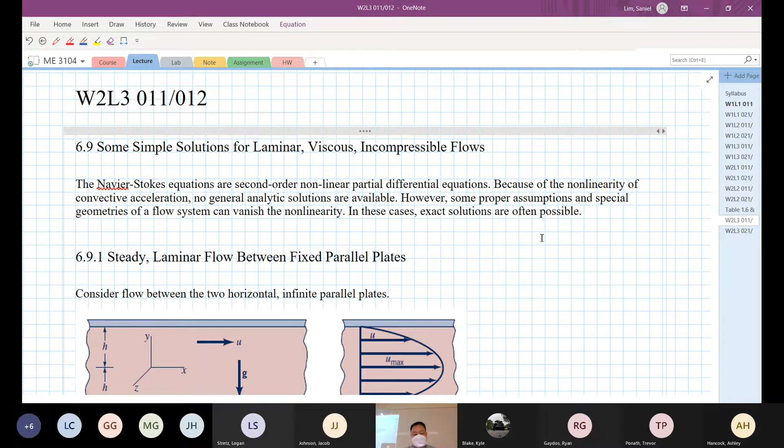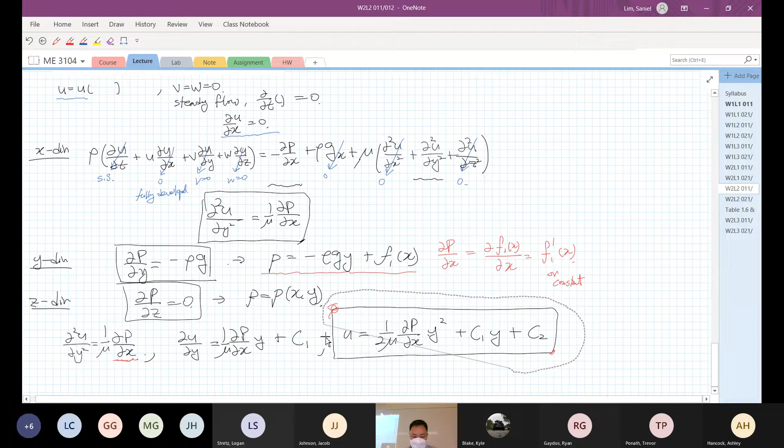So let's go back to here. This is what we have from yesterday. Let's just copy that. Yeah, it's huge. Okay.

Now it's time to plug in the boundary condition. We still have the same setup: two infinite plates, up and bottom, top and bottom, fixed at their location, and the flow is fully developed and steady state. It is incompressible Newtonian fluid.

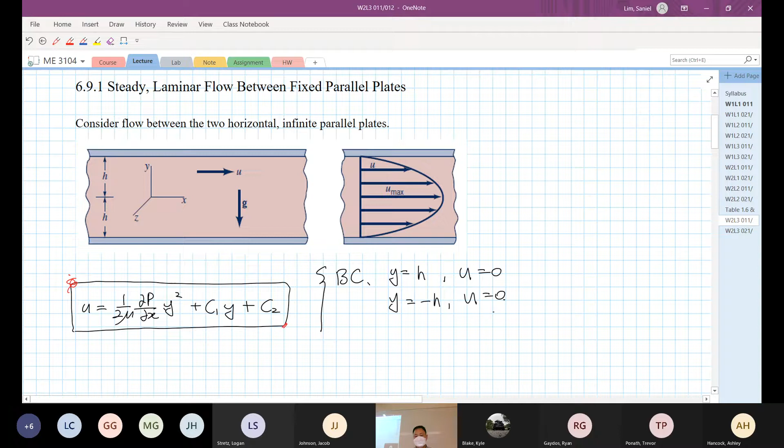So now it's time for the boundary conditions. What we have here is when y equals h, u is 0, and when y equals minus h, u is 0 as well. It looks kind of similar, but it's going to give us the answer for C1 and C2.

If you plug that in, then u at y equals h: it's going to be h here, and C2. P here is basically constant. Then you have h squared plus C1h plus C2.

If you plug in y equals minus h, you'll see the same term here, except for this one, and those are 0. So we have the equation C1h plus C2 equals 0, and minus C1h plus C2 equals 0. That means we have to set C1 equals 0, otherwise it's not solvable.

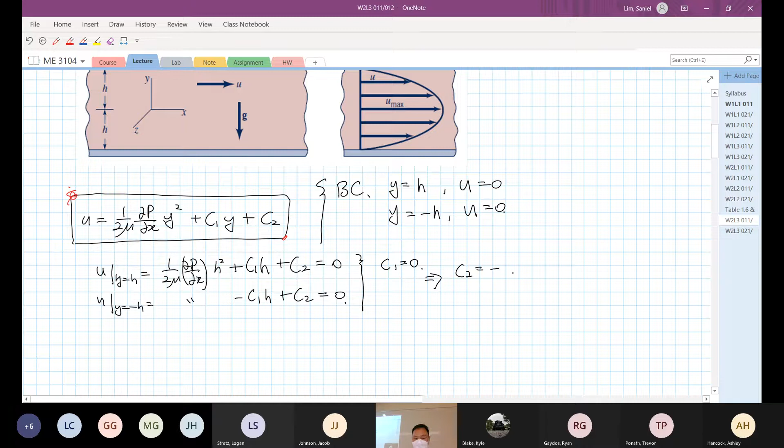From here, we can set C1 equals 0, then C2 automatically comes out of this expression, which is minus h squared over 2 mu, dp/dx. Then you can plug that into u. If I write down the organized form, that's going to be 1 over 2 mu dp/dx, then you have y squared minus h squared.

So this is the parabolic equation. This is the velocity profile between the fixed plates.

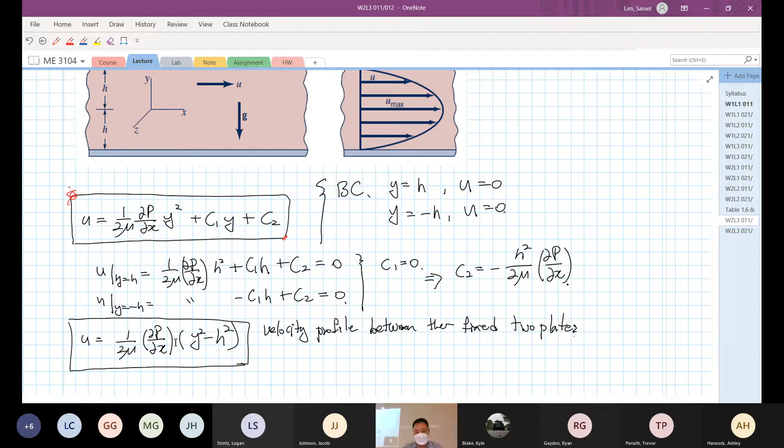So if you know the pressure gradient, you can find the velocity at the certain location, or if you know the velocity, you can find the pressure gradient, so on. So when you have an expression between the velocity and the pressure gradient, then you can just do a bunch of other things too. So first, the volume rate flow.

So in this case, we are actually having the 2D dimensional geometry here. So it's going to be not Q, it's going to be Q over the width - in the z direction, which is the axis through the screen here. Then we can just use the notation of Q.

And it's as simple as the integrate from the bottom to the top for the velocity, right? That's going to be minus h. Then you have an expression of the u now, so I'll just put the u, and it's integral with respect to the y-axis. This is per unit, let's say, the z axis.

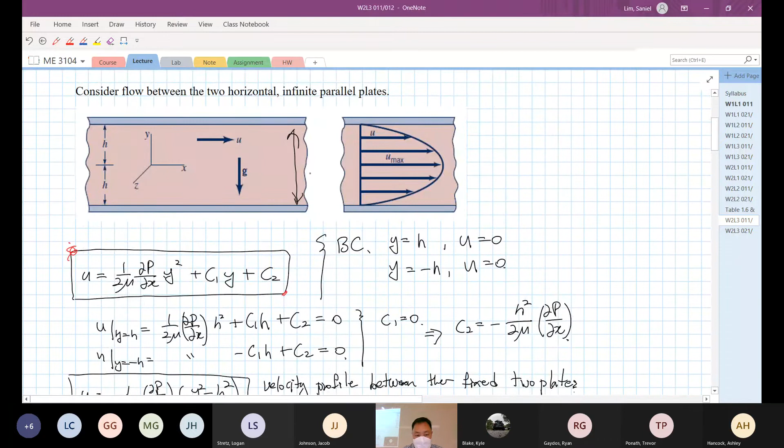All right, then it's going to be Q over A. So then simply you can just divide by the area. In this case, actually, the area is the 2D - so is this 2H. So everything is per unit width in z-axis, so the same as Q in the 2H.

Then if you just divide by the 2H, it's going to be simply - let's use this expression - then H squared over 3 mu delta P over L.

The next thing is going to be max velocity.

So we have a parabolic expression for the velocity profile. Which location will we get the maximum velocity here? Of course, along the center line, right?

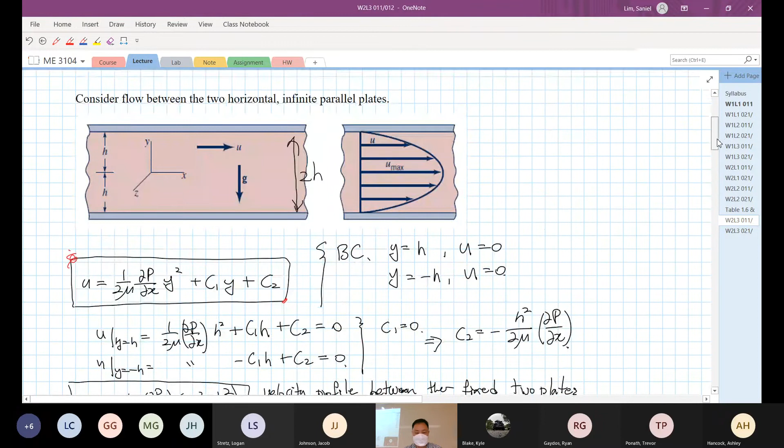So along the center line, y is going to be 0. In the equation, when you put y equals 0, it's going to be the highest absolute value from the minus h squared, but the dp over dx is going to be negative, so it's going to be the max number.

So simply, u max is going to be when you plug y equals 0, then the expression is going to be 1 over 2 mu, let's write dp dx, and minus h squared. But then you can simplify this to 2 mu.

Express this with the mean velocity, then it's going to be what? This 2 over 3 over 2... so when you have a mean velocity, the maximum velocity is going to be 1.5 times the mean velocity. Okay, so that's the relation between the mean velocity and the max velocity.

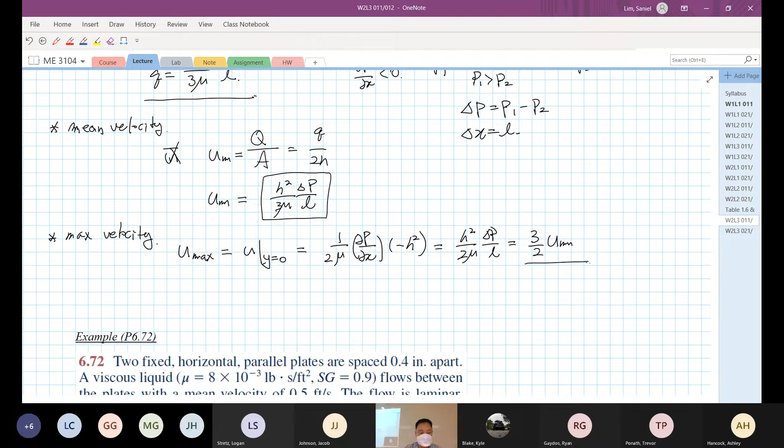Anyway, if you have an expression for the velocity profile, you can simply find those values if you need to.

The last thing is the pressure distribution, the pressure variation. So from here, we left the expression equation from the y direction: p equals minus rho g y plus f(x), which is from the differential relationship, dp over dy equals minus rho g.

From here we know p is simply minus rho g y plus an unknown function in terms of x. Then we can actually now know it's a pressure gradient, because when you take the partial derivative with respect to x, it's the same as dp over dx times x, so we can just replace it with that, and leave the constant term at the end.

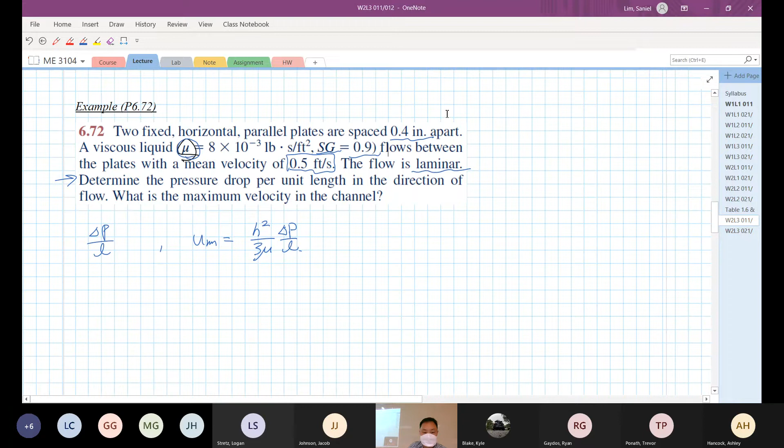We set up the axis in the middle of the pipe, the middle of the spacing. So the 0.2 is going to be the one. So when you plug it in, h is 0.2 inch, then you have to convert it into feet, right? Everything is in feet, second, and pound units. So when you do it, it's going to be 0.01667 feet.

Then rho is going to be what? Rho H2O multiplied with the 0.9, that's the specific gravity. So it's going to be 1.940 slug per feet cubed.

You don't need this time. So the mean velocity is 0.5 feet per second. It's going to be 0.01667 squared, then 3, and the mu is what? The 8 multiplied by 10 to the minus 3.

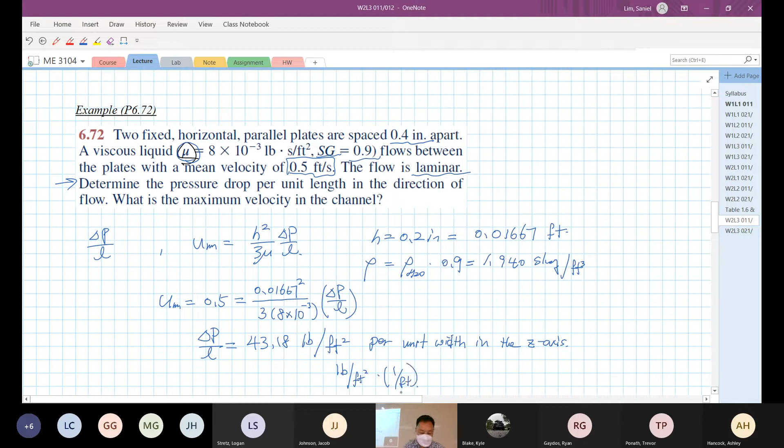Then the last one is maximum velocity, u max. So it was simply what? 1.5 times the mean velocity. So it's just simply 0.75 feet per second.

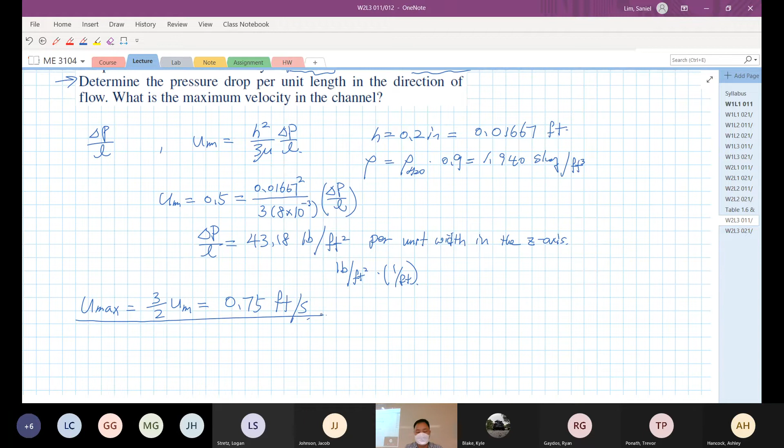So when you have those exact solutions from the specific flow field case, this is one of the simple ones. Then you can just use the exact solution to solve for any flow field based on a similar setup here. So you're going to go through some of them more.

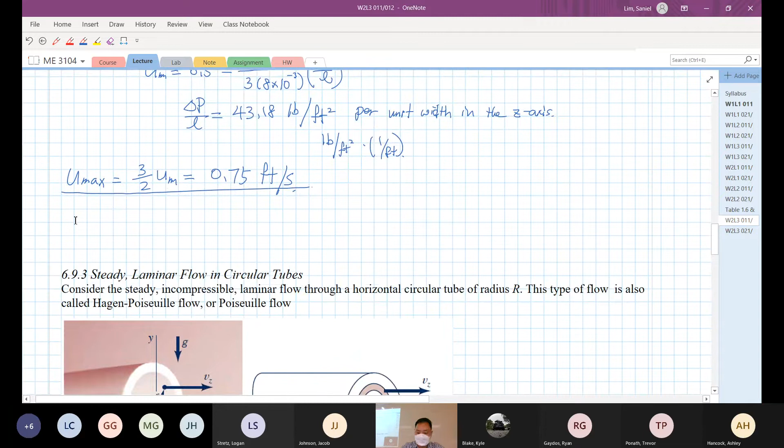Actually, another one is Couette flow, but I'll just jump into the one in the circular tube first because we're going to deal with this equation tomorrow in the lab.

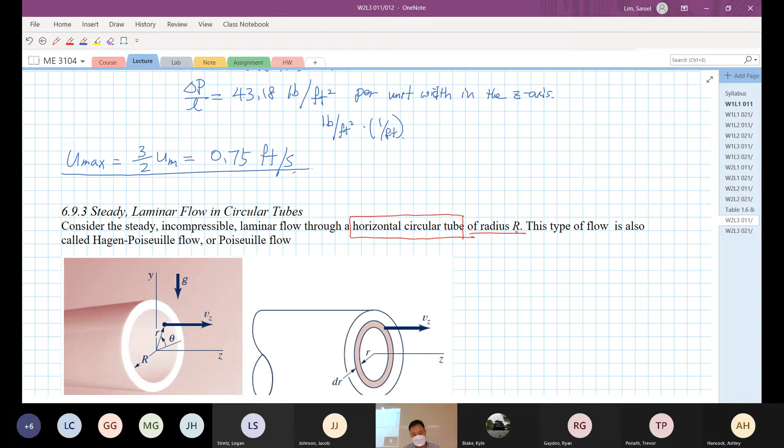Now consider a steady, incompressible, laminar flow. Everything's the same as before, through the horizontal circular tube, but we have a slightly different setup with the radius r. We call this type of flow the Hagen-Poiseuille flow, or just simply Poiseuille flow. Those are all the same name. This is really a popular one because we just flow all the water in the pipe, and this equation can be applied.

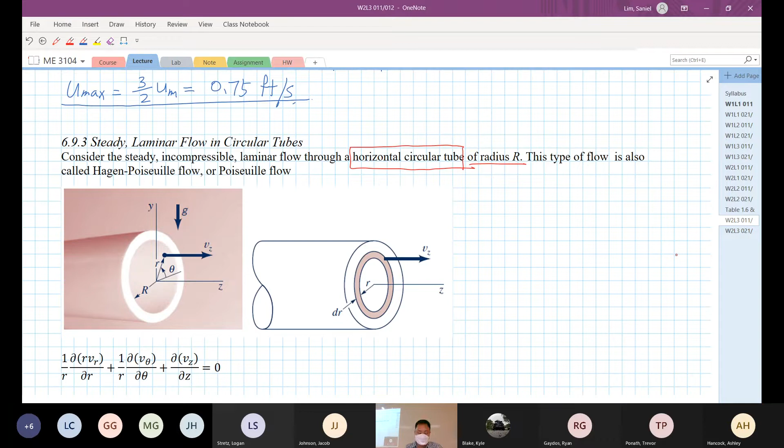This exact solution can be applied to any water flow or Newtonian flow field as long as it's laminar flow. Since we're dealing with the circular shape of the tube, it's better to use a cylindrical coordinate system. That's why I just copied all the Navier-Stokes equations here, in R, theta, z. Of course, if it's problems in the quizzes or exam, you're given the equation, so don't worry about that — you don't have to memorize it.

Just take a look at some geometry here. We have a circular pipe, and the z-axis is directed along the actual direction of the pipe. Of course, the radial direction is along the radius, and theta is given from some reference point. Then we have a gravitational force, and the velocity flows across through the streamline in the pipe, so of course it's going to be a function of r in this case.

But let me just write down another one. First of all, what I'm going to do is find the gravitational force. Gravitational force is simply defined in vector form as minus g, in this case j. That was all, but actually we are using the r theta z axis in this case, so we have to convert it into the r and theta axis, which is the transverse axis.

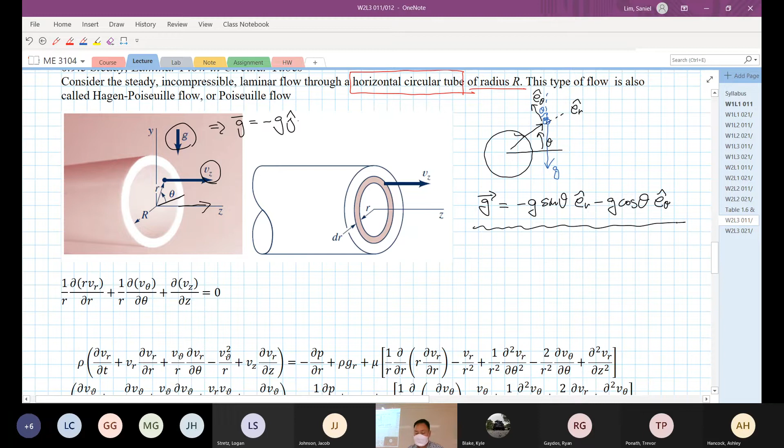So that's why we usually keep GXYZ, and also in this case G R theta Z, because you don't know whether you have a gravitational force in those directions — it's based on the orientation of the coordinate system, of course.

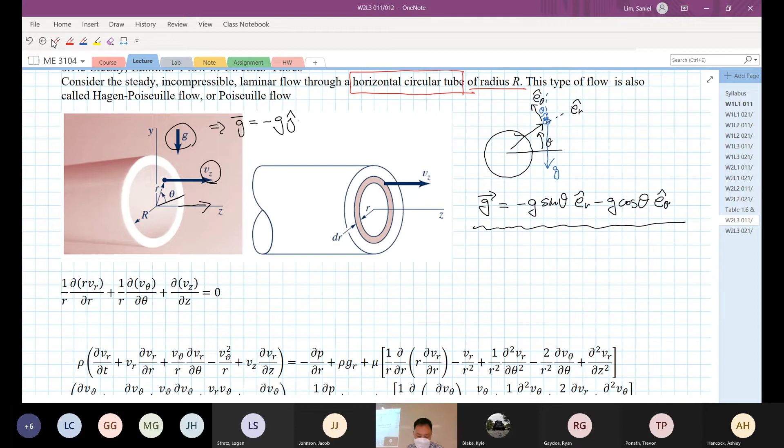Okay, then let's go through the assumptions now. We know it's steady state, so can I just make a little bit of space here? Oh, nope, okay, let's just write it down.

So steady state, whenever you have a d/dt, it's going to be 0. The incompressible, rho is constant. The laminar flow, of course, horizontal circular. The radius r, all right.

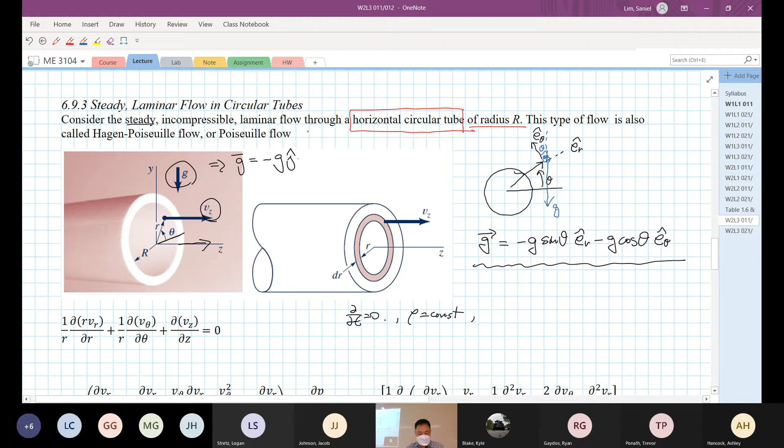Then let's go into the equation now. So we have the flows in the z-axis, therefore Vz is Vz of some function, but Vr and V theta are going to be 0, because it's fully developed and steady state. There's no change in the velocity along the z-axis too. So whenever you have a dVz over dz, that's going to be 0 too.

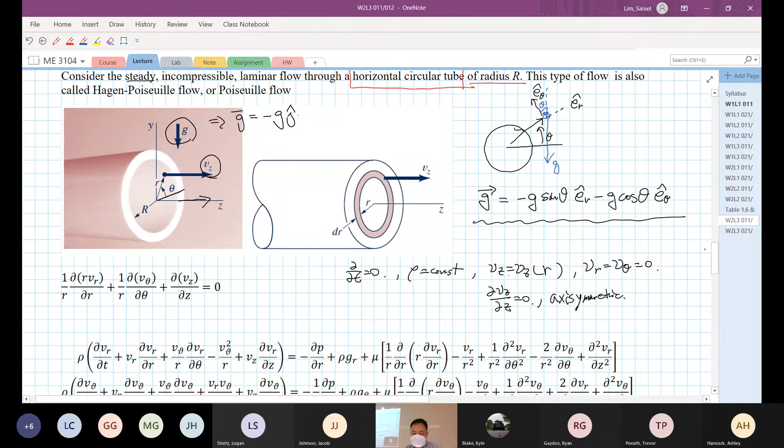And now looking at the velocity here, Vz is going to be the function of what? Previously, it was a function of y. In this case, it's now a function of r. Why not for theta? Okay, this is axisymmetric geometry, so it's not going to be the function of theta. Also, you can say axisymmetric. All right, those are the ones we know of.

Then just let's apply those assumptions here. So this is continuity. Of course, you can start with the linear momentum equation, yeah, for sure. But it's always good to start with the continuity, so you can just check. At least you can find whether it's some function of x, y, z, or in this case, either a function of r, theta, z. All right, of course, you can just remove here.

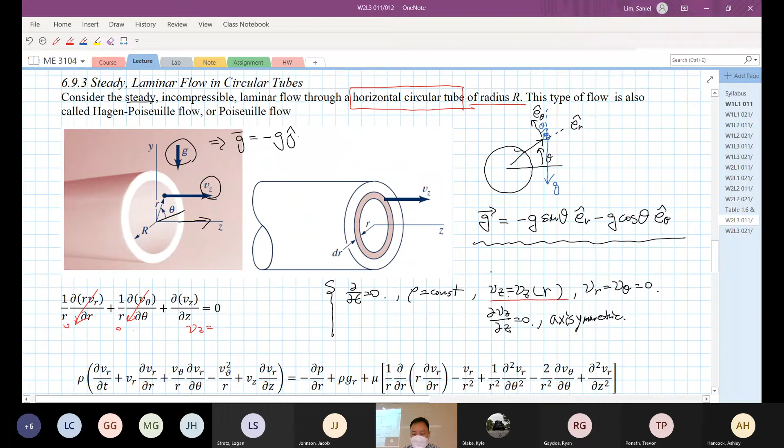Then it's time for the Navier-Stokes equation. Of course, yeah, incompressible Newtonian fluid, we can always use the Navier-Stokes equation. This is just a little bit different. We have extra terms because of the effects of the cylindrical coordinate system, but we can just still apply the same assumptions.

All right, first of all, VR and V theta equals 0, so we can just take out all the terms here. Let's use a different color. And V theta is 0, so this is all gone, gone. So VZ, okay, VZ is available, but it's a function of R, so we can just remove it. Here we have a V theta, so d VZ over dZ, so this is 0 too.

And here is a pressure, all right, pressure gradients along the R axis and theta axis and Z axis. Those are going to be kept in this equation. Then G, so we have GR and G theta components, so I'm going to just keep these two, and not this one, that's going to be 0.

And all along the R axis, what you have here is VR over VR, V theta over VR. So eventually you're going to just remove all terms here. All right, so we pretty much just remove all of them. And the theta direction, we have V theta, VR, V theta, okay, at least we just remove all here. And V theta is also 0, so it's 0 too, nothing is out there.

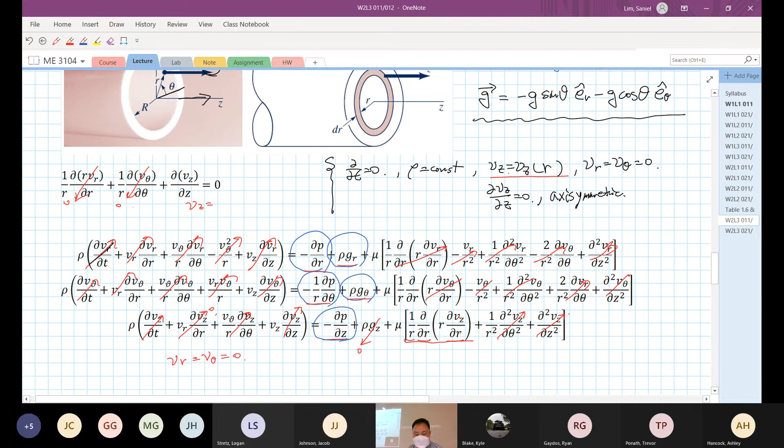So from the first expression, dp over dr plus rho g r. So let's just plug that in. So gr was a minus sign g, so it was minus rho g sine theta. Then you can just take the integral over to both sides with respect to r, which is dp is minus rho g sine theta d... I'll just use the d actually.

Oh, I just leave it there. I just change the d because it's all about the p. So then we have the expression that says p equals minus rho g r. Of course, it's all about the r and sine theta. Then plus, I don't know, the known function, let's say just prime, and it's going to be theta and z.

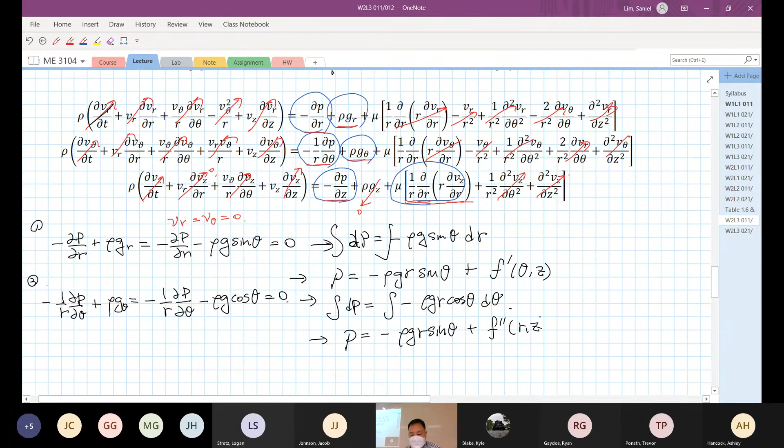So we have the same expression here for the p. Then it's going to be not about theta, not about r. So we at least know the p is minus rho g r sine theta plus some function of z. We're going to just leave it out there just as is, and we're going to just revisit.

And then finally, the third equation along the z-axis, what we have is 0 minus dp dz plus mu, 1 over r d over dr, r dvz dr.

Okay, so finally, the same here. I'm going to just move the pressure gradients to the left side and divide by mu and move the 1 over r again. It's going to be d over dr. You don't have to do this for the lab reports, by the way. Oh, it's not a report, so you don't have to derive the equation, at least for the lab. I'm doing it. It's going to be mu, 1, the dp over dz, and we have r.

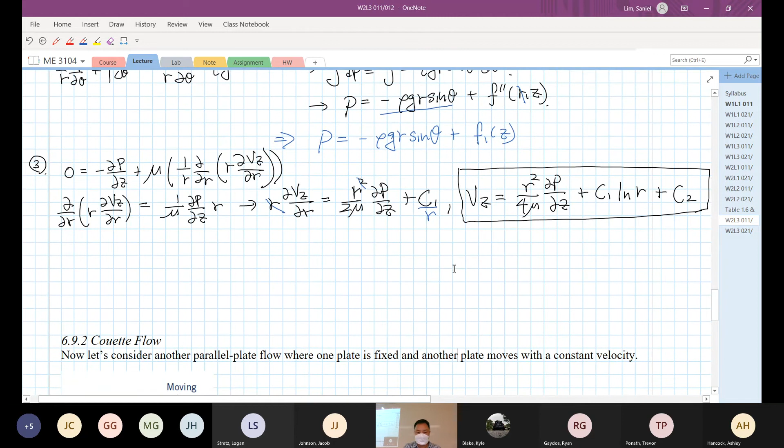Okay, this is it. This is the velocity profile of the flow in the circular pipe. Now it's time to apply the boundary condition like we did for the infinite plates.

What's the boundary condition at this point? What do you have? We have just one boundary condition, right? When r is large r, this is r. So when r is large r, which is the radius, then we have always no slip condition. So vz equals 0.

We have two unknowns, actually. We need one more boundary condition. That actually comes from the maximum velocity. When you look at the value at r equals 0, let's take a look. The vz, so r equals 0, which is 0, plus C1 ln 0 plus C2. I don't know what the number is, but you can definitely say the ln 0. If you look at the graph of the ln, natural log, it looks like this.

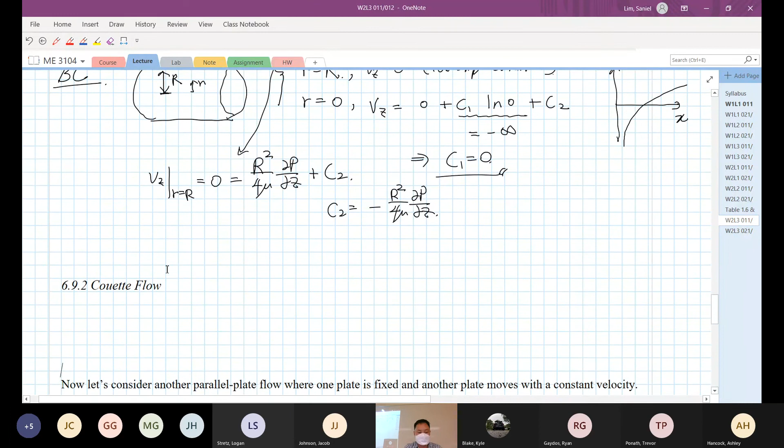So let's just write down this solution now. You will have Vz equals 1/4 mu dP over dz, then you just have r squared minus capital R squared. This is the velocity profile, the velocity distribution at any cross section.

Okay, so now we're going to look at the volume rate of flow and mean velocity, max velocity. You can take the integral over the pipe. It's going to be this integral from 0 to capital R, which is the end of the radius, then Vz, then you need 2 pi r, which is the circumference of the differential element, and it's going to be dr.

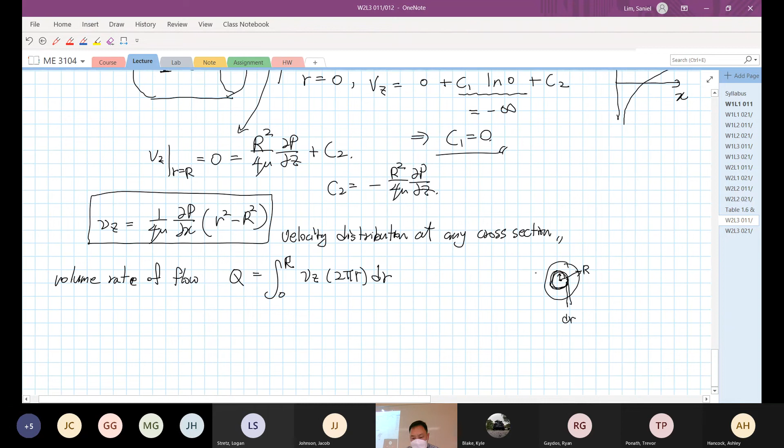Now you might check this with the one we have for the infinite plates. It's going to be a little bit different. Again, we can also use the pressure drop instead of the pressure gradient, so we can just knock out the negative sign. Then we can have the expression, same here, but with a positive value with delta P over L. L is going to be the two points you set within the flow.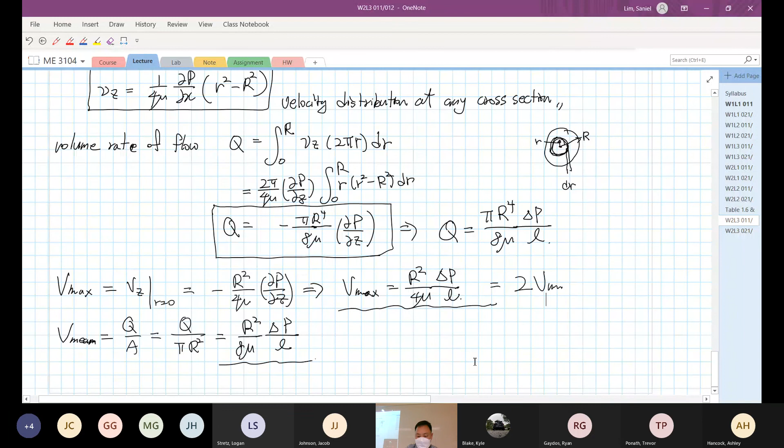Okay, again we have a mean velocity, so let's take a look at the max velocity. It was 3/2 of the mean velocity for the infinite plates, but now actually it's 2 times the mean velocity in the flow. So we have a little bit different numbers, right?

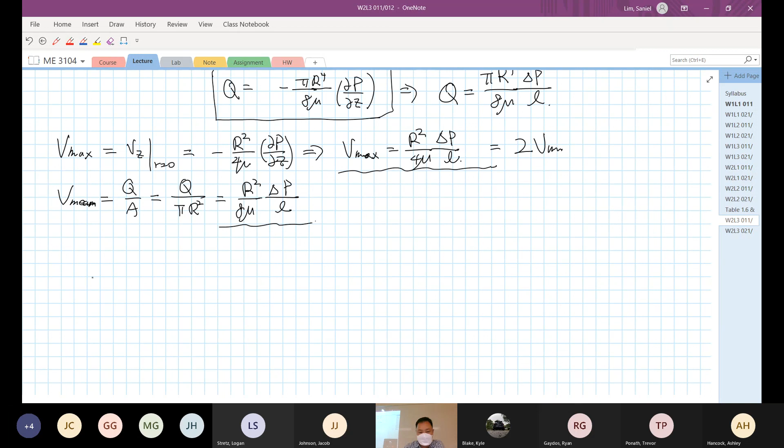Okay, it's time to finish it. So I'll just pick up this to show you how we can find the dimensionless form of the equation. Then you can just apply those equations to find some valuable information from your experiments. So just take a look at these equations again: the volume rate of flow, the maximum velocity, and the velocity across the pipe. We're going to use this equation to see how we can find the actual velocity within the pipe.

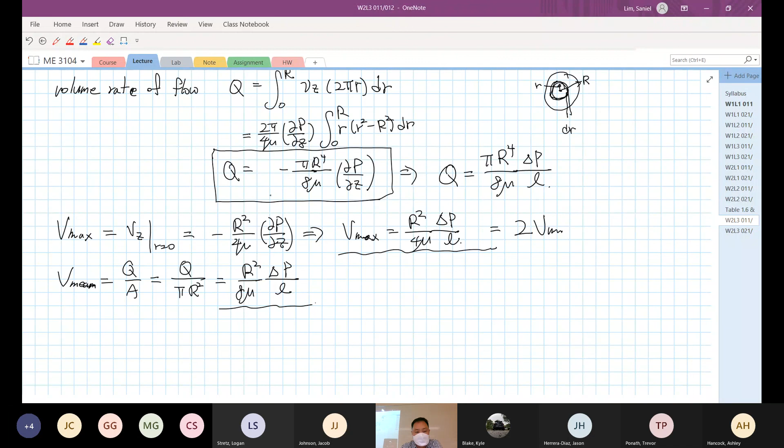Hold on, what's that? VM, it's a mean. Yeah, so we usually like M, this is a mean velocity. Now max is just we call max.